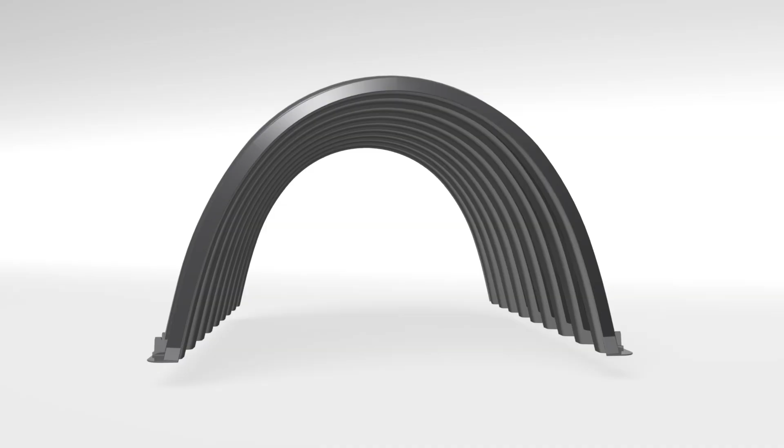Welcome to the HydroStor Stormwater Chamber installation video. HydroStor chamber systems are a highly effective way to maximize commercial land usage by providing underground stormwater storage and recharge. Let's get started.

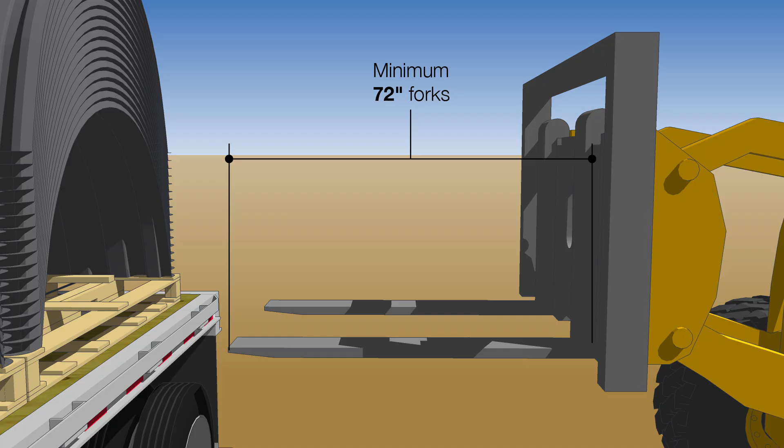Upon delivery to the project site, visually inspect the chambers and end caps for damage and to ensure accurate quantities. After inspection, unload the pallets with a forklift with a minimum of 72-inch forks. Place pallets in an area that is flat, free of debris, and away from construction traffic to avoid potential damage. Chambers and end caps may remain on the pallets until they're ready to be installed.

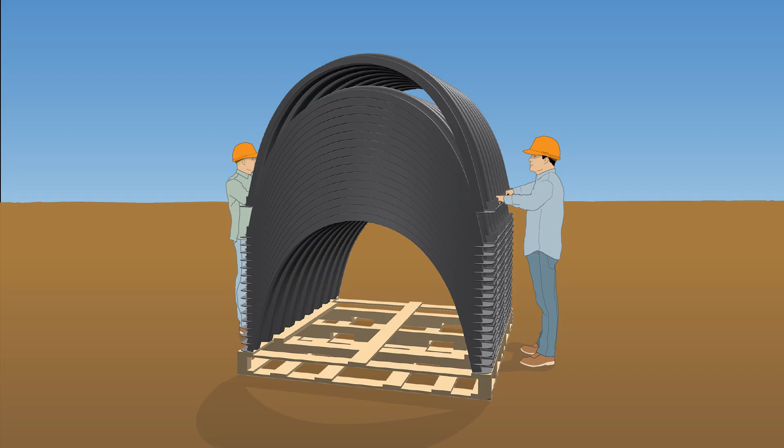HydroStor chambers feature integrated handles to allow them to easily be moved and set in place. To remove the chambers from the pallets, carefully cut and remove the banding from around the chambers. With two people, use the handles to lift the chambers off the pallet and carry them into place. Warning: the chambers must not be removed from the stack by pushing them off from one side. Removing the chambers in this manner may result in chamber damage, injuries, or even death.

Due to the inherent hazards associated with excavation, special precautions should be taken. Obey all federal, state, and local guidelines for excavation safety.

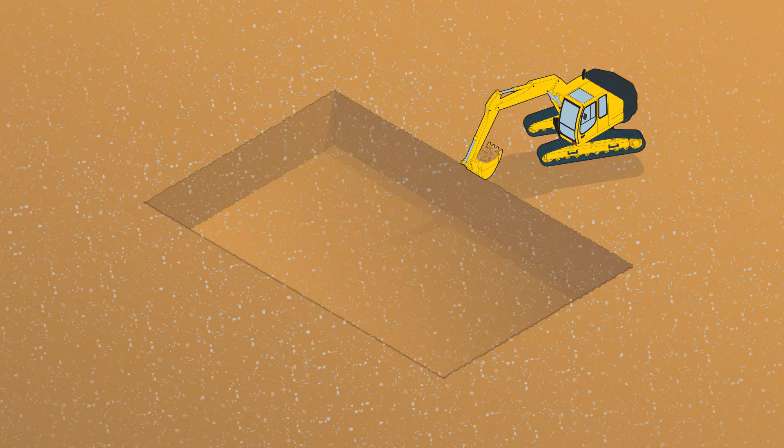Using the project plans, excavate the chamber system bed, making sure to allow enough space for the entire system, including the chambers and manifolds. Ensure you have a minimum of 12 inches of excavation between the side walls and the chamber system, a minimum of 6 inches for HS-180 and 12 inches for the HS-31, HS-75, and HS-290 between the sidewall and the end caps.

A stable foundation is required for installation. If water or unstable soils are present, take appropriate measures to ensure you have a stable foundation. The method used to remedy the issue will depend on your specific circumstance. The design engineer should be consulted to determine the appropriate method based on the site conditions.

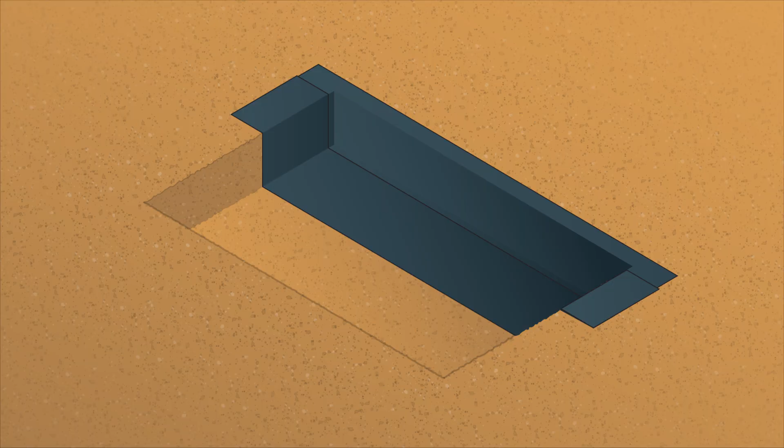Once your excavation is deemed stable, place a 4 to 6 ounce AASHTO M288 Class 2 or 3 nonwoven filter fabric on the bed bottom as a separation layer. When placing the fabric, be sure to maintain a 24-inch overlap at all seams.

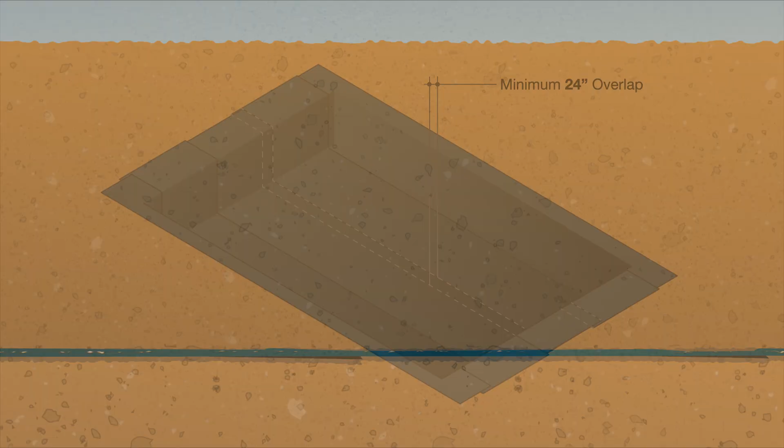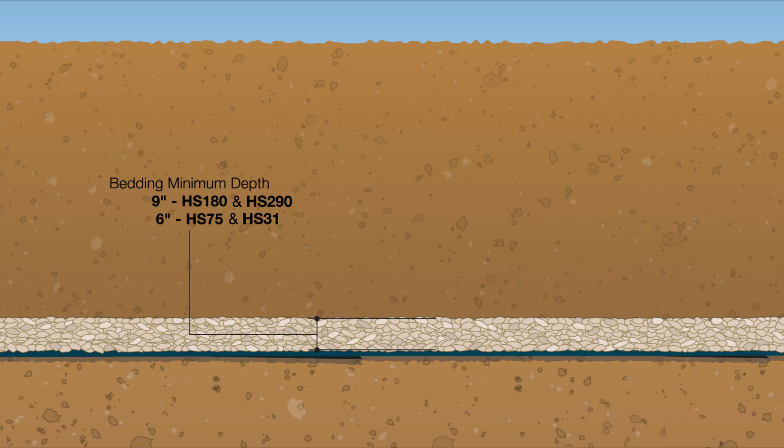After the fabric has been laid out, place a level base of 3/4 of an inch to 2-inch clean, crushed, angular stone over the entire excavated bottom. The bedding should be a minimum of 9 inches for the HS-180 and HS-290 chambers and a minimum of 6 inches for the HS-75 and HS-31 chambers. Additional bedding stone may be necessary based on the native soil conditions and the burial depth of the chambers. Consult the Prinsco representative for minimum recommendations. Using a vibratory compactor, compact the stone base to achieve a flat, level surface.

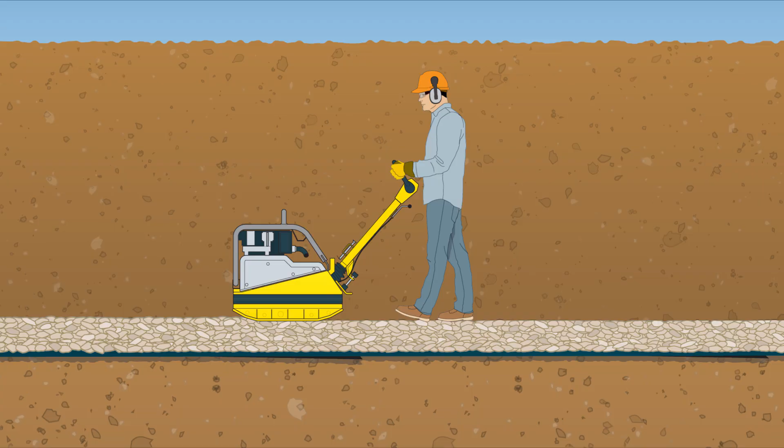If specified in the project plans, a perimeter underdrain may be laid in the stone bedding. Be sure it's not installed under a chamber footing.

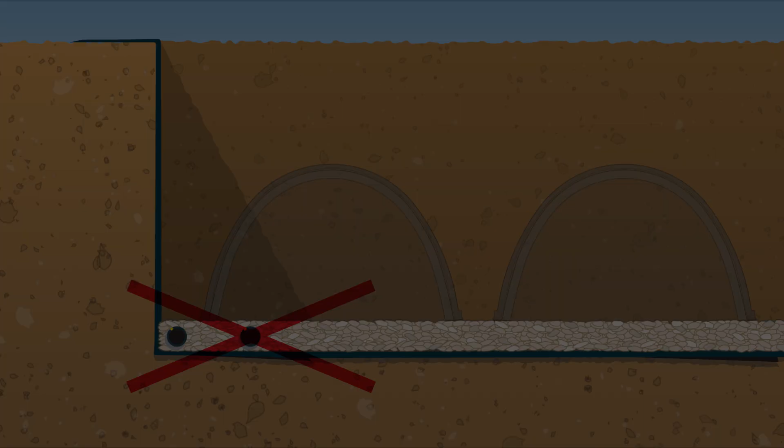A manifold is used to distribute the stormwater to the chamber rows. A manifold system will typically consist of Prinsco GoldFlo dual-wall pipe fittings and split-band couplers. Using project plans, lay out the manifold system at this time.

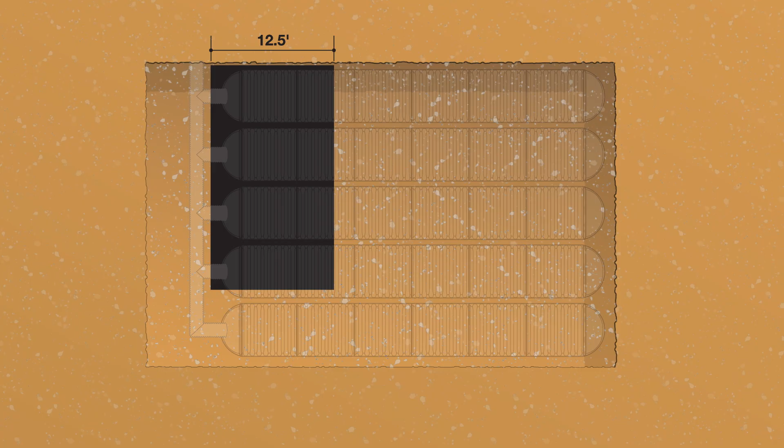To alleviate the potential for scour at the inlet locations, lay a 12.5-foot wide strip of an AASHTO M288 Class 1 woven stabilization geotextile along the entire length of the manifold mainline, adequately covering the bedding beneath the inlet locations. The fabric should extend a minimum of 12 inches in front of the end caps.

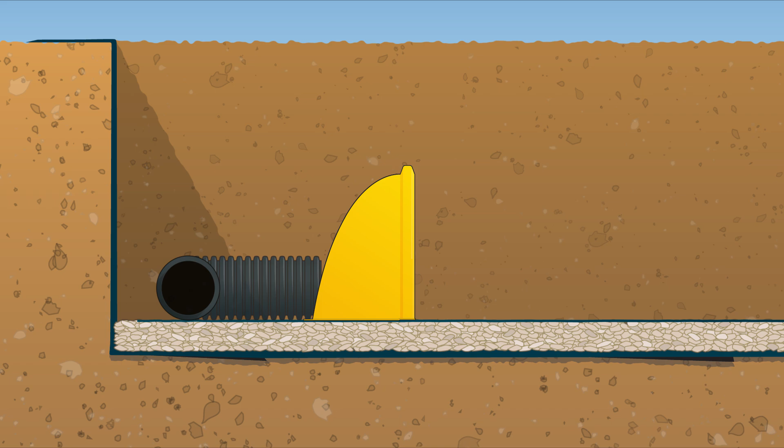Position the end caps of each row with the inlet pipes. At the required locations and elevations, core an opening in the end cap the approximate outside diameter of the pipe and insert the inlet pipe. The inlet pipe should penetrate 12 inches into the end cap. Repeat this process for each row. Cover any voids on the end caps greater than 3/4 of an inch with a non-woven geotextile to prevent infiltration of the backfill material.

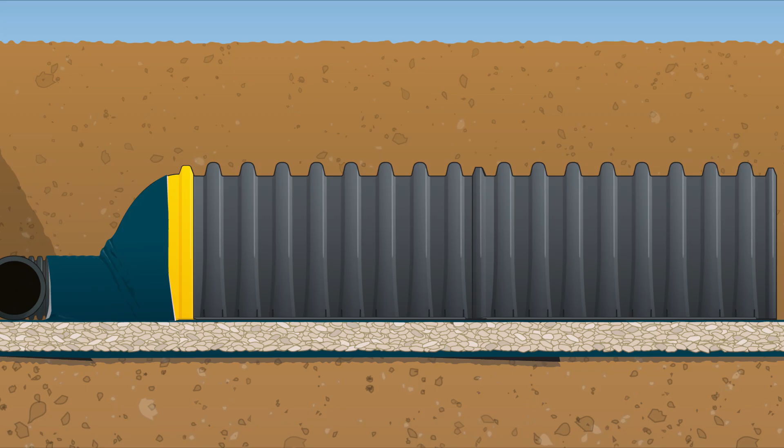Position the chambers in line with the end caps, noting their orientation. The chambers are stamped with arrows showing the direction for installation. The end caps will fit over the first rib of the chambers. The assembly of each row is achieved by overlapping the last rib of the initial chamber with the first rib of the succeeding chamber. End caps should be used to terminate each row of chambers.

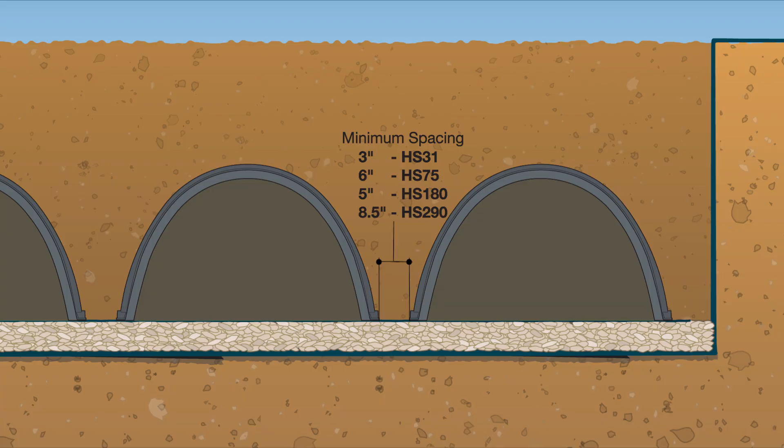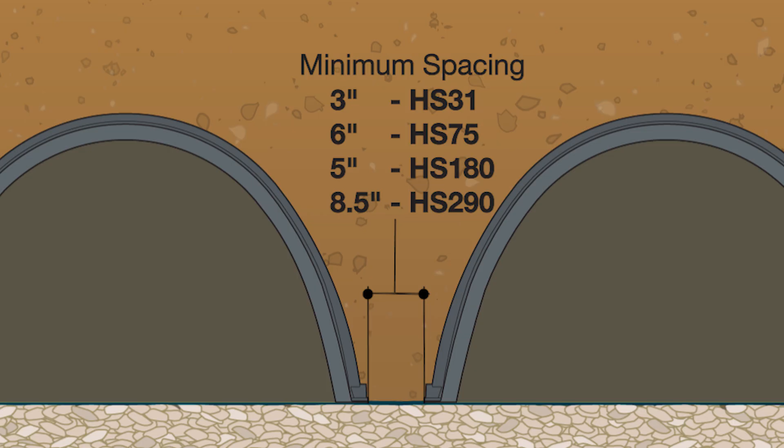During the assembly process, do not extend the chamber rows beyond the reach of the backfill placement equipment. Maintaining a minimum clear space between each row is required for adequate structural support. Clear space should be a minimum of 8.5 inches for the HS-290, 5 inches for the HS-180, 6 inches for the HS-75, and 3 inches for the HS-31. A spacer is recommended to maintain the required spacing.

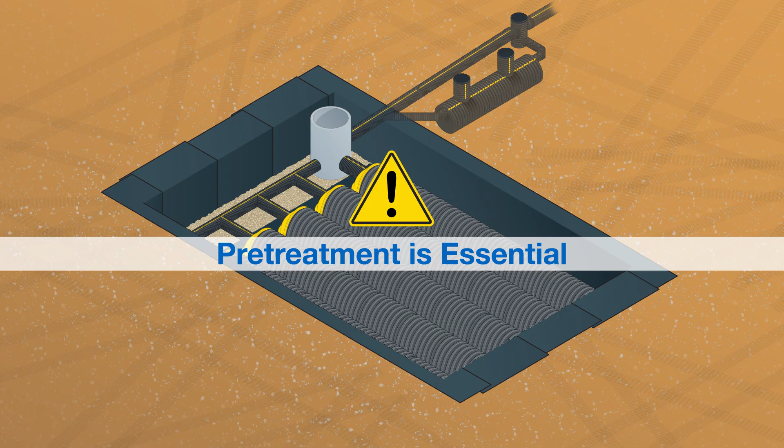Considering chambers have open bottoms, it is essential to utilize a pre-treatment system to remove sediment and debris before the influent enters the chamber system. Prinsco recommends pre-treatment by using either a Prinsco Stormwater Quality Unit and/or a chamber sediment row. It is important to consider the local water quality regulatory requirements and the expected influent contamination.

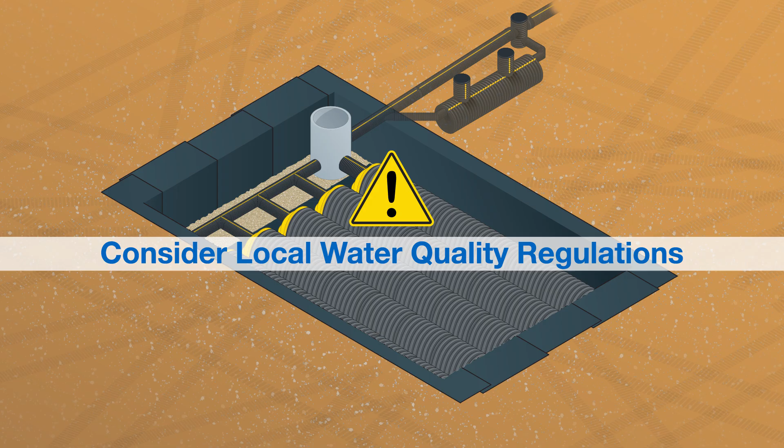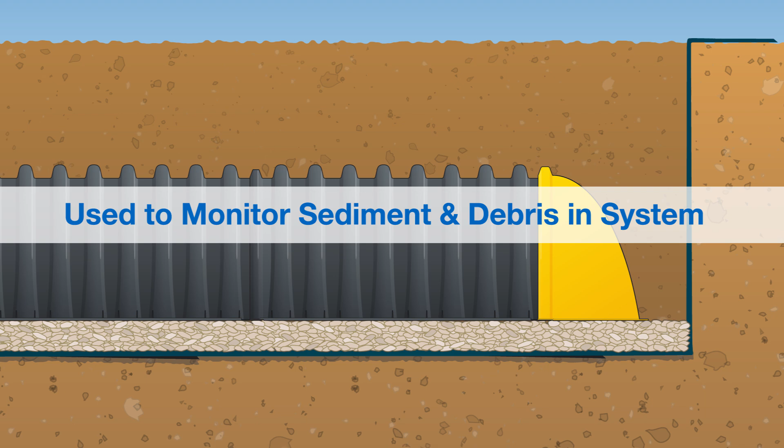Inspection ports are not required. However, they may be installed to monitor the sediment and debris level within the system. Using the project plans, identify which chambers should be fitted with inspection ports.

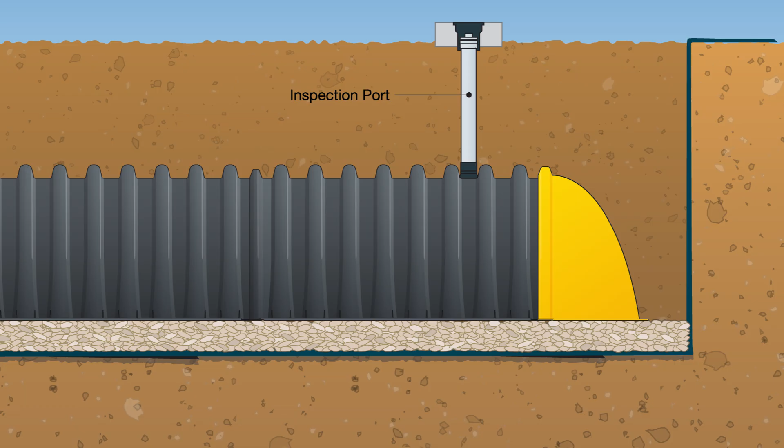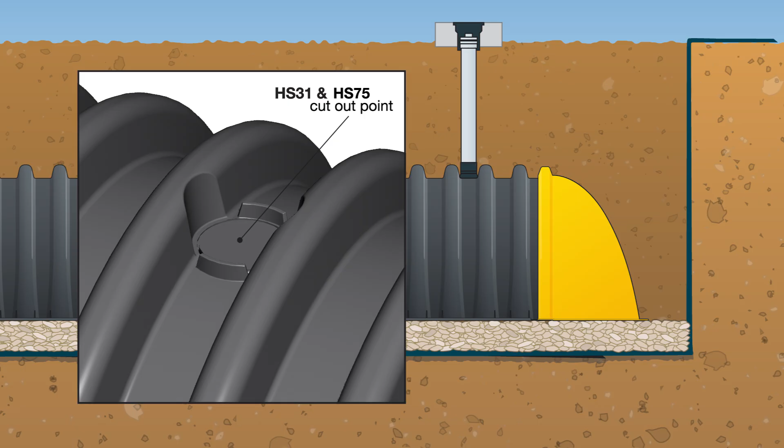Using a hole saw, cut out the opening at the appropriate location. A rubber gasket connection can be used to connect Schedule 40 or SDR35 PVC pipe and fittings to build the inspection port. For the HS-180 and HS-290 chambers, a 4-inch vent or inspection port may be drilled in the valley between the corrugations. The HS-31 and HS-75 chambers are equipped with one circular cutout point to accommodate a 4-inch diameter inspection port.

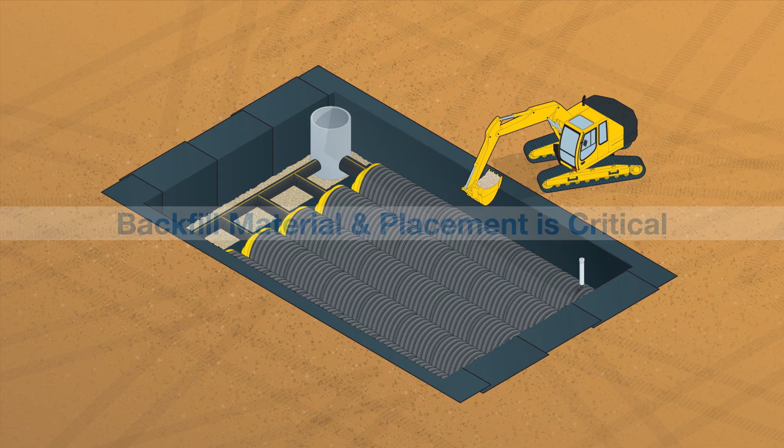The backfill and chambers function together as a structural system to support the soil overburden and vehicular live loads. Therefore, proper backfill material selection and placement is critical. Backfill material used for embedment, anchoring, and surrounding areas should comprise of a 3/4 to 2-inch clean, crushed, angular stone.

Placement of backfill material is best accomplished by using the long reach of an excavator or stone shooter conveyor system. No construction equipment shall be situated on top of the chamber system without the minimum cover specified.

Compaction of the crushed stone around the chambers is not required. However, it is critical to ensure that the backfill is adequately knifed in around the manifolds and between the chamber corrugations. In order to prevent chamber shifting and to maintain the appropriate row spacing, carefully deposit the stone evenly along the center line of the chamber, allowing the stone depth between the rows to rise equally. During this phase, stone height between rows should not differ by more than 12 inches.

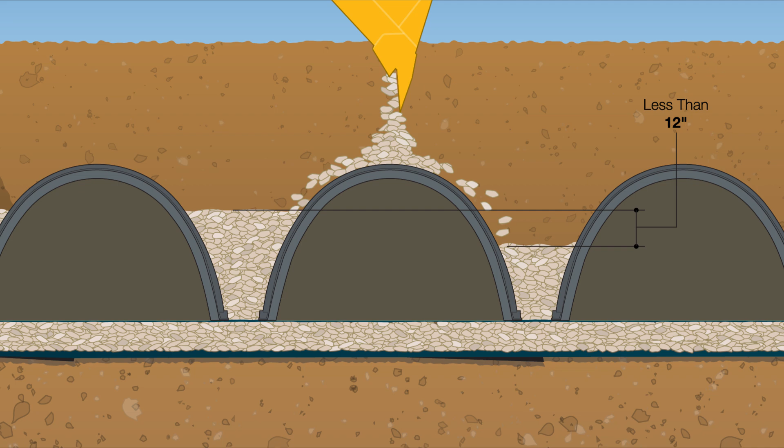After the anchoring is complete, stone placement may continue to surround the chambers and around the perimeter. The embedment backfill stone should fully encompass the chambers and extend evenly from the chambers to the sidewalls of the excavation. After the required embedment backfill has been placed, 12 inches for the HS-180 and HS-290 and 6 inches for the HS-75 and HS-31,

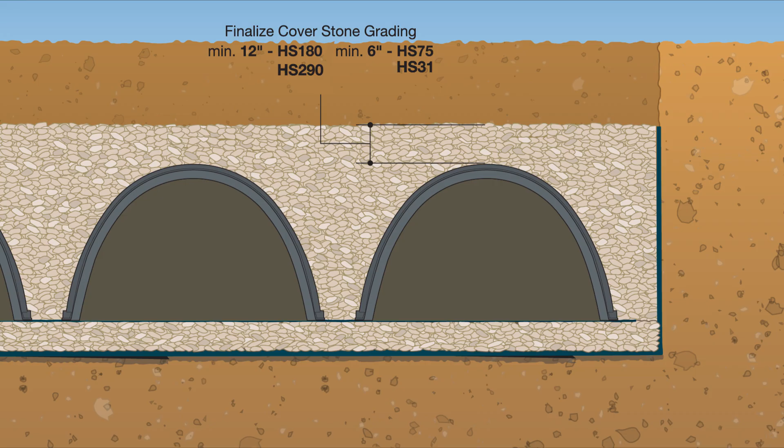a small, lightweight tracked dozer may be used to finalize the grading of cover stone. Equipment should run parallel to the chamber rows at all times. Wheel and roller loads are not allowed at this time.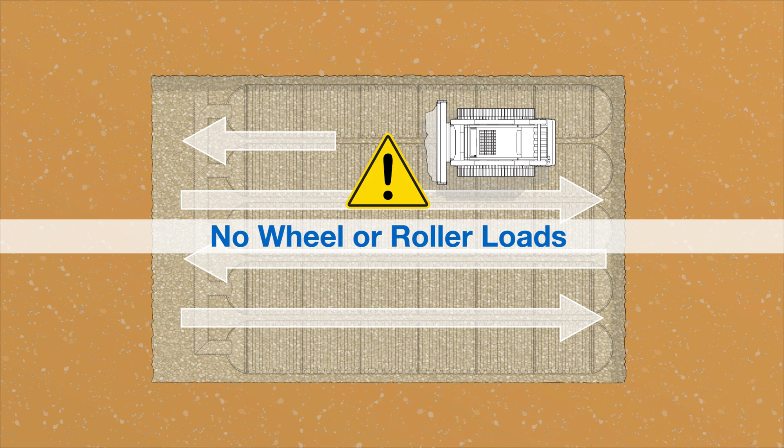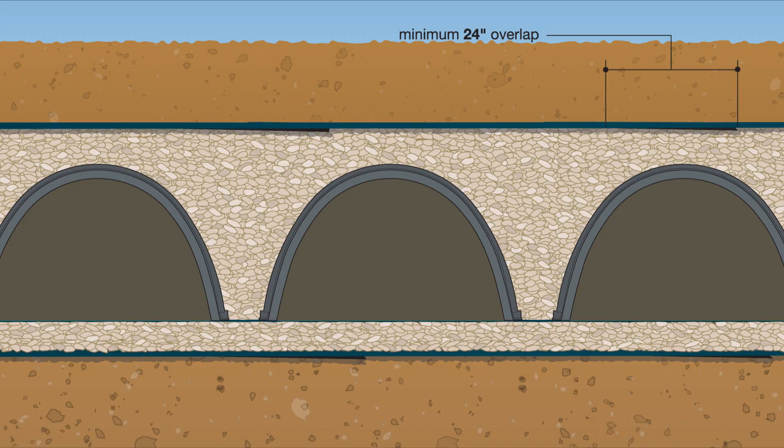After the embedment backfill has been evenly spread, the entire top of the stone bed should be covered with a layer of AASHTO M288 Class 2 or 3 nonwoven separation and filtration geotextile, overlapping seams a minimum of 24 inches. Utilizing an excavator positioned next to the chamber rows, the initial backfill can now be placed over the top of the fabric. The initial backfill should be a well-graded granular material.

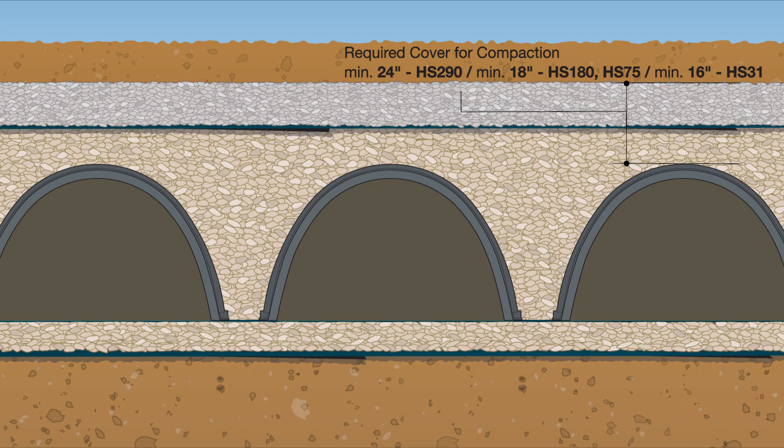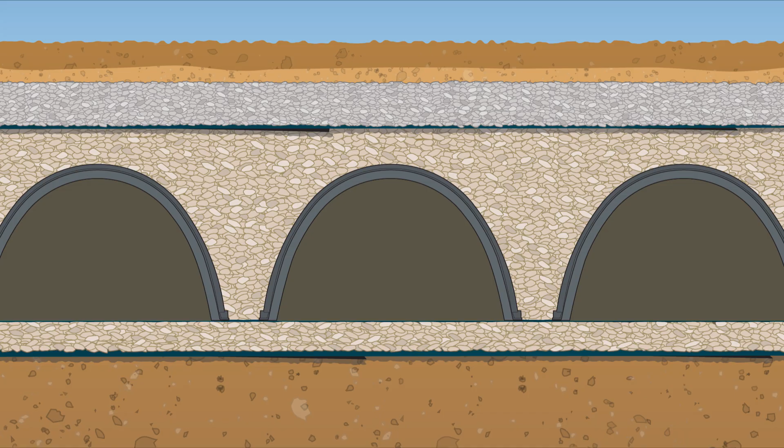After a minimum of 24 inches for the HS-290, 18 inches for the HS-180 and HS-75, and 16 inches for the HS-31 has been placed, compaction of the backfill may begin. It is recommended that the compaction equipment travels parallel with rows. After the initial backfill has been placed and compacted, the final backfill may be placed to reach the required ground elevation.

Measured from the top of the chambers to the bottom of pavement, chambers should have a minimum cover of 24 inches for the HS-290, 18 inches for the HS-180 and HS-75, and 16 inches for the HS-31 for H20 vehicle loading.

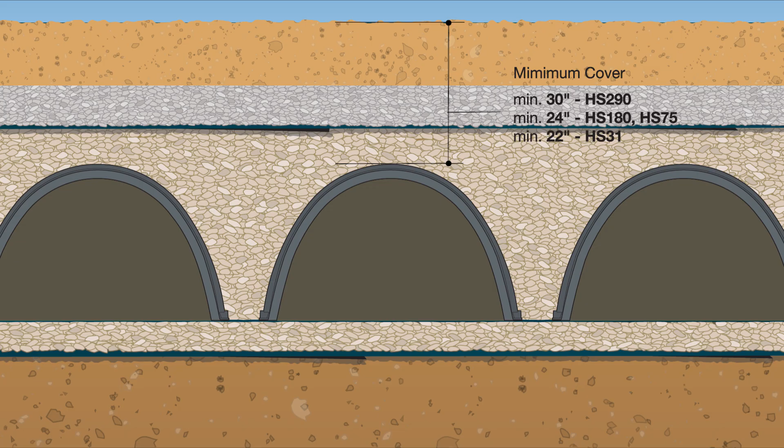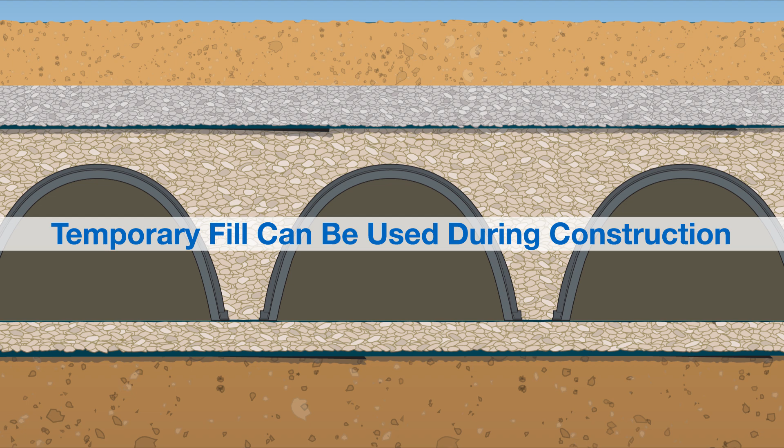If pavement is not to be used, the cover should be increased to a minimum of 30 inches of cover for the HS-290, 24 inches of cover for the HS-180 and HS-75, and 22 inches for the HS-31 for vehicular loading. If the chambers will experience loading from construction equipment while the project is still being constructed, temporary fill may be placed over the system during construction and removed after the heavy equipment traffic is rerouted. The maximum burial depth for all chambers is 8 feet.

Proper installation of your chamber system is critical to ensure structural integrity and maximum service life. This can be achieved by following the steps laid out in this installation guide. They were: easy handling with 2 people. Make sure to excavate adequate room for the system and ensure you have a stable foundation.

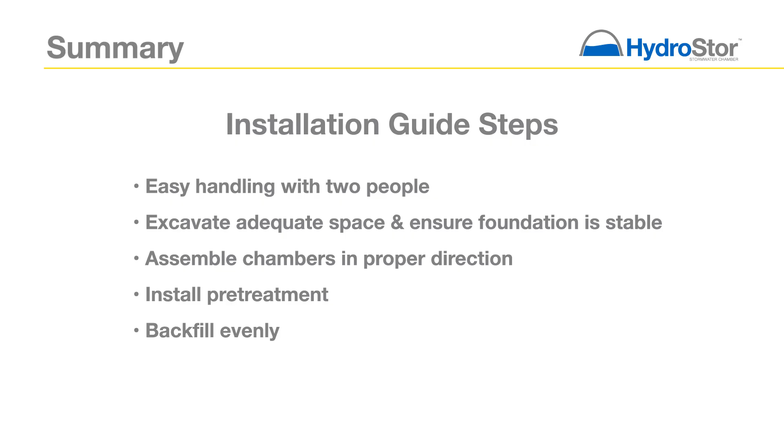Assemble chambers in the proper direction as indicated by the arrows on the chamber. Install pretreatment structure and/or sediment row. Backfill evenly to prevent chamber shifting. Be sure to check the minimum and maximum cover heights.